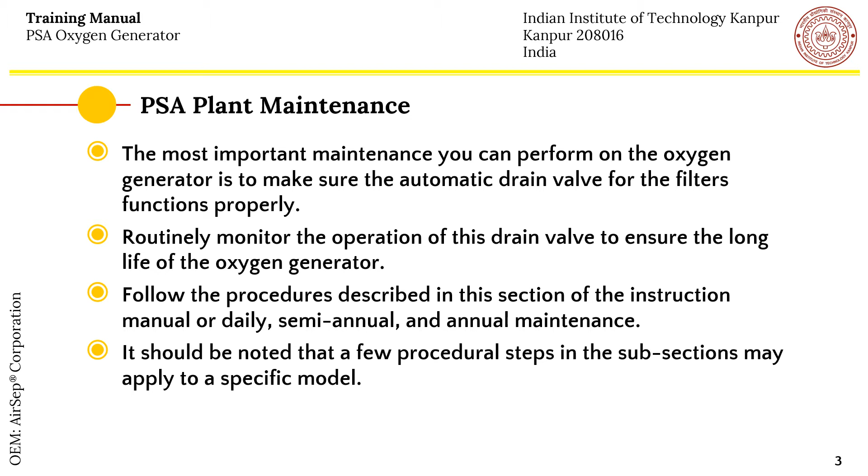Follow the procedures described in this section of the instruction manual for daily, semi-annual and annual maintenance. It should be noted that a few procedural steps in the subsections may apply to specific models only. Use the following chart as a guide to perform maintenance on a regular schedule.

For the daily schedule, make sure the automatic drain functions properly. This is very important. For the monthly schedule, inspect the filters and bowls. Clean the bowls or replace filters as necessary. Half yearly or 6 monthly maintenance, replace the particulate filter element. And every year, annually, replace the coalescing filter element. Check the performance of automatic valves and actuators and clean and lubricate the feed air regulator.

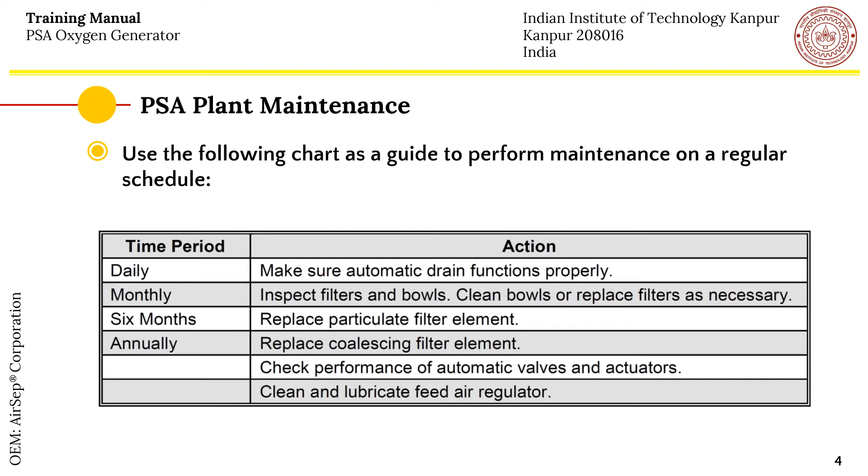Make sure the condensate outlet and tubing for the drain valve is not obstructed. Condensate should discharge from this outlet or tubing for approximately 3 to 5 seconds every 10 minutes when the oxygen generator is running. Press the manual drain button on the control panel and observe the discharge. The discharge should flow freely and be clear of oil and water within 5 seconds.

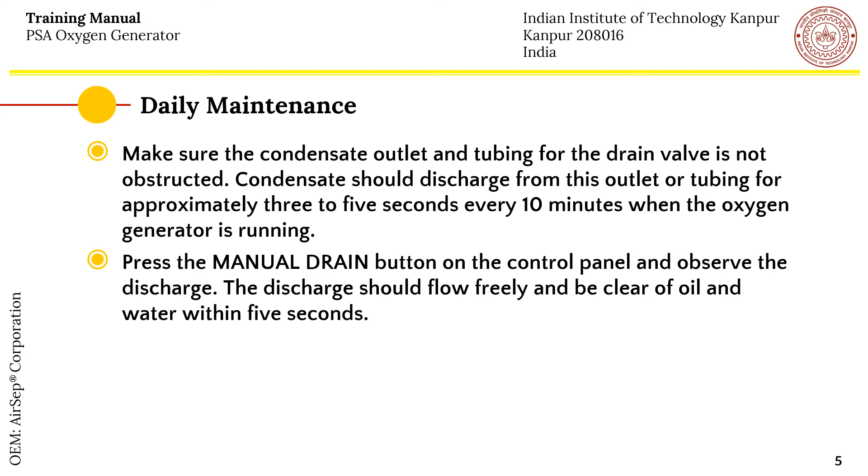For the monthly maintenance, the monthly monitoring requires inspection of the filters and testing the performance of the automatic drain valve. To perform this procedure, depressurize the unit and remove the filter bowls as described in the following procedures. Please refer to section 7.3 depressurizing the filters and section 7.4 changing the filter elements. When the filter bowls have been removed and cleaned, perform the following steps.

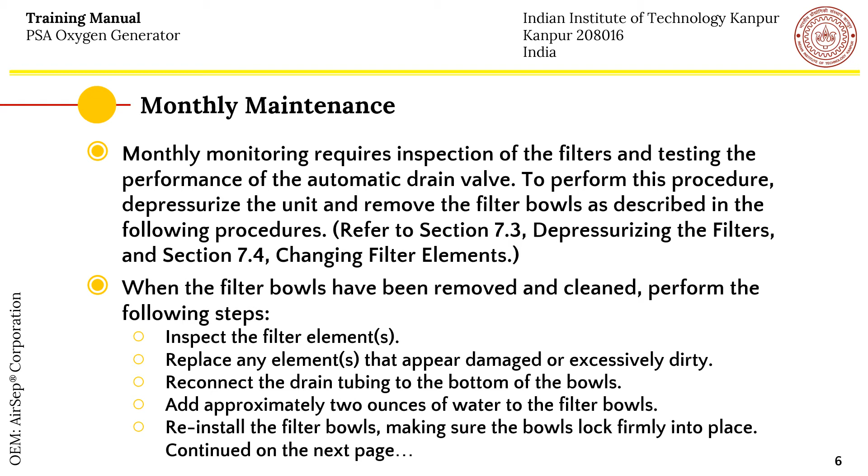Inspect the filter elements. Replace any elements that appear damaged or excessively dirty. Reconnect the drain tubing to the bottom of the bowls. Add approximately 2 ounces of water to the filter bowls. Reinstall the filter bowls, making sure the bowls lock firmly into place. Slowly open the manual inlet valve fully to pressurize the filter bowls.

While observing the drain tubing, press the start icon on the main system control screen and determine whether the automatic drain valve discharges moisture. Fully close the manual inlet valve and depressurize the unit as described later. You can also refer to section 7.3 depressurizing the filters. Remove the filter bowls as described later. Refer to section 7.4 changing the filter elements.

Observe whether the water drained from the bowls. If the filter bowls still contain water, refer to the troubleshooting chapter of this instruction manual later. If the bowls do not contain water, reinstall the bowls and repressurize the system. You can refer to section 6.4, changing the filter elements.

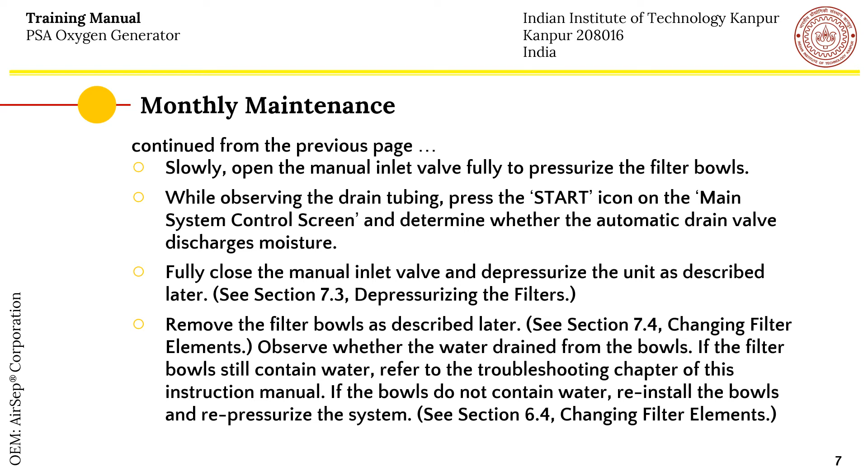Please note, during the depressurization of filters, the oxygen generator filters contain pressurized air. To perform monthly maintenance or change filter elements safely, fully depressurize the filter assembly as described in the procedure in this section. To safely depressurize all oxygen generator components, refer to the procedure described later in this chapter, which is the section 6.5, depressurizing the oxygen generator.

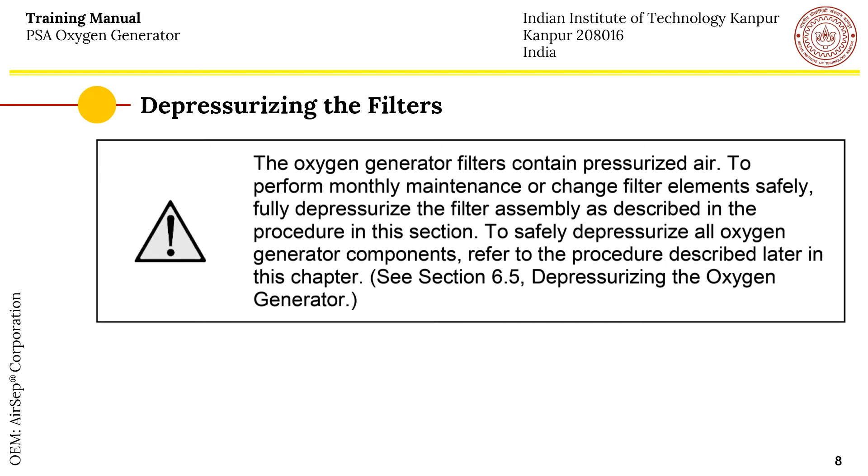Depressurizing the filters. Allow the oxygen generator to stop cycling in auto mode when the oxygen receiver pressurizes fully. Press the stop icon on the main system control screen. Disconnect the oxygen generator from the power supply. Fully close the manual inlet valve V1 and manual filter outlet valve V2. Shut off the feed air supply at the air compressor or air header.

Reconnect the oxygen generator to the power supply. Press the manual drain button on the HMI until the air no longer exits from the drain tubing. Please note, if the pressure gauge does not decrease to 0, shut down the unit and call the AirSep Corporation Commercial Products Division immediately.

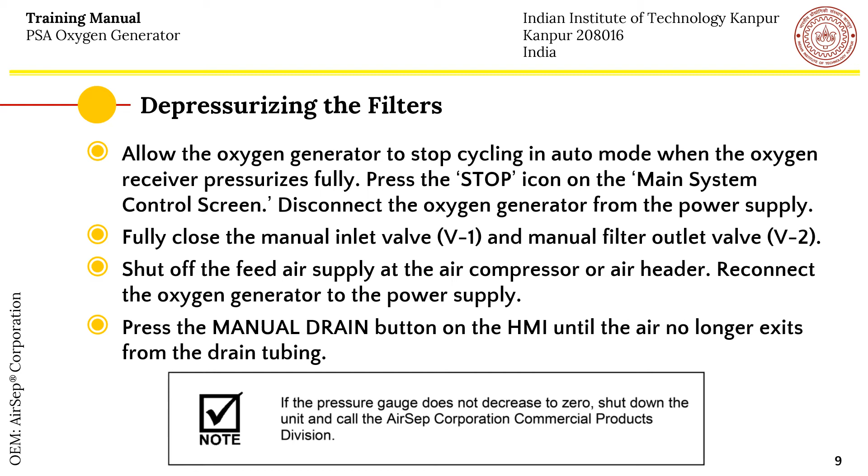Changing the filter elements. The time period to change the filter element depends upon the feed air conditions. If the feed air is highly contaminated with dust, oil, etc., the filter element must be changed more frequently than the specified time interval in the manual. The following procedure describes how to change the filter element for either the particulate filter semi-annually or the coalescing filter annually.

Shut down the oxygen generator and depressurize the filters. Refer to section 7.3, depressurizing the filters. To remove the bowl from either filter, push down the bowl latch and rotate the bowl slightly right or left while pulling down on the bowl. If the filter has screws, loosen them up.

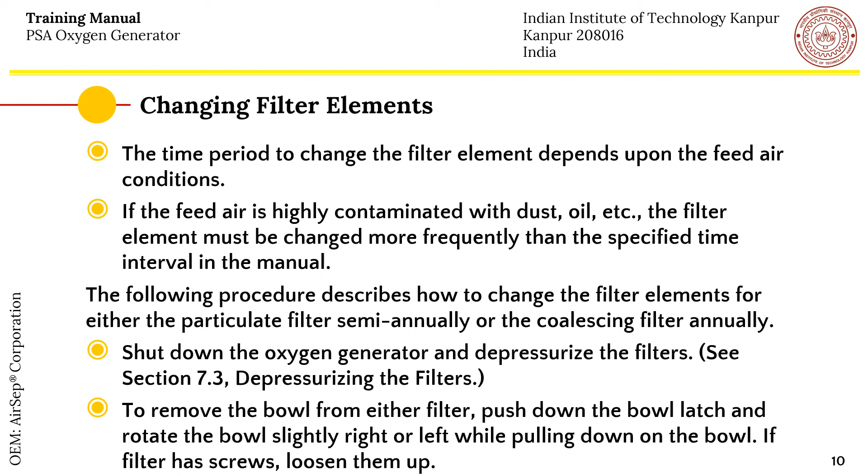When the bowl is free, disconnect the drain tubing from the bottom of the bowl. There may be a retainer nut which has to be disconnected to remove the filter element for the filter models with screws. Wash the bowl in warm soapy water and then rinse the bowl. Gently unscrew the old filter element and discard it.

If you are replacing a coalescing filter element, remove and discard the black gasket where the top of the filter element connects to the filter housing. If you are replacing a coalescing filter element, make sure a black gasket is attached to the top of the new element.

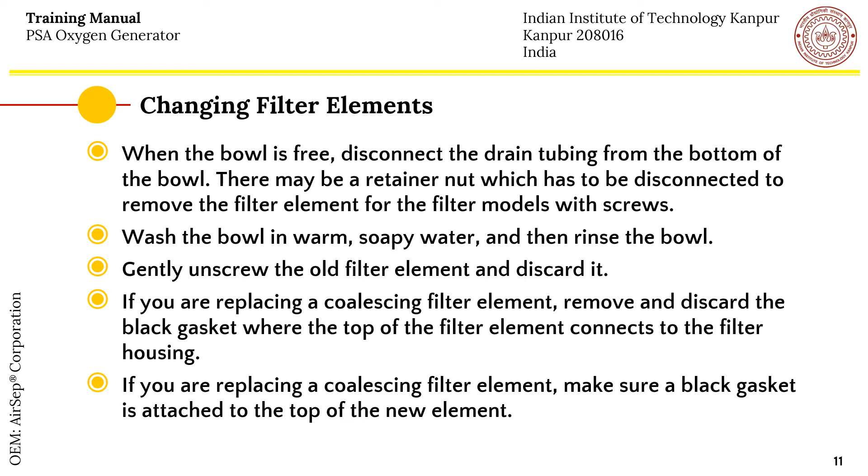Changing the filter elements. Taking care not to touch the filter portion of the new filter element, screw it into the position from which the old filter was removed. Reconnect the drain tubing to the bottom of the bowl. Reinstall the filter bowl, making sure the bowl locks firmly into place.

Slowly open fully the manual inlet valve and manual filter outlet valve. Turn on the feed air at the air compressor or air header. Now connect the oxygen generator to the power supply. Please note, do not attempt to remove the filter bowl unless the filter assembly fully depressurizes as was described in section 7.3.

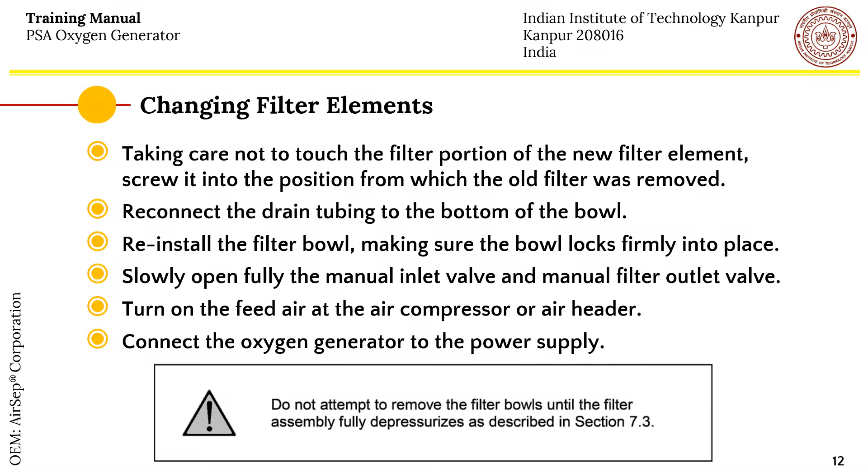The oxygen generator operates with pressurized air and oxygen. To perform maintenance on the unit safely, fully depressurize the oxygen generator components as described in the procedure in this section. Please note, to fully depressurize the oxygen generator components, follow steps 2 to 7 to depressurize the filter assembly as described in section 7.3. If the pressure gauges do not decrease to zero, shut down the unit and call the AirSep Corporation Commercial Products Division immediately.

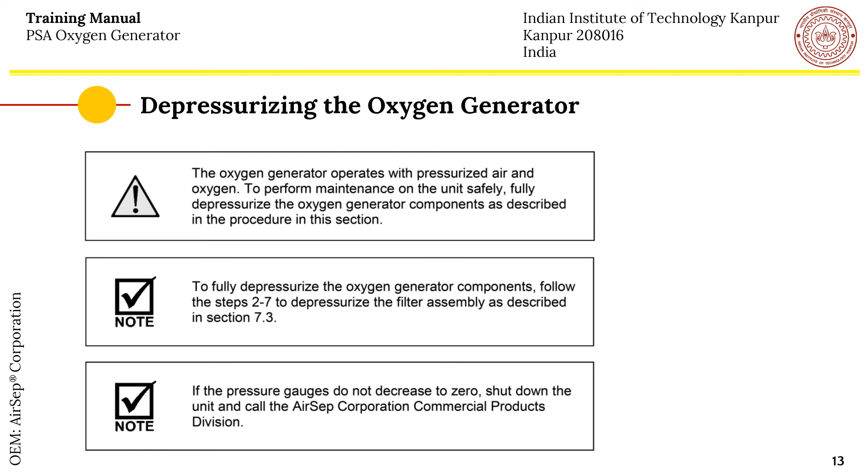Depressurizing the oxygen generator. Shut down the oxygen generator and disconnect the power supply. Please see section 6.3, how to shut down. Fully close the manual feed number 2 valve, that is V2, and the manual product valve V3. Connect the oxygen generator to the power supply. Press the start icon on the main system control screen. Set the oxygen generator to manual mode.

Allow the unit to operate until gas no longer exhausts from the muffler and the parameters and output screen indicate approximately zero pressure. If the unit is depressurized, power down the unit if required and proceed to perform the maintenance.

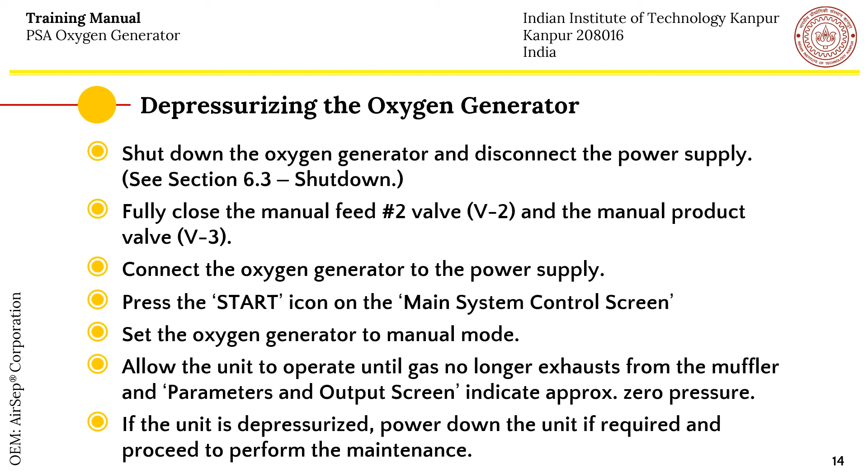Adjusting the feed air regulator. The feed air regulator may require readjustment after any maintenance is performed. Please ensure that the feed air regulator setting is not changed during readjustment. If the feed air regulator requires adjustment, perform the following procedure. Unlock the lock nut on the adjustment knob. To increase the feed air pressure, rotate the knob clockwise. To decrease feed air pressure, rotate the knob counterclockwise.

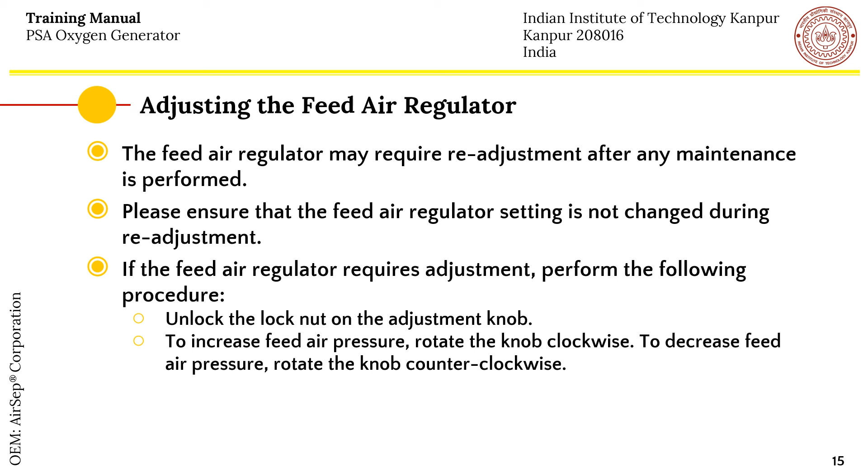While adjusting the feed air regulator, please note, setting the feed air regulator to a value such that the maximum oxygen generator bed pressure is 80 psi gauge or more can cause severe damage to the molecular sieve in the adsorbers, which will not be covered under the warranty. The numbers on the dial of the feed air regulator do not always directly correspond to the actual cycle or bed pressure in the system. Check on the parameters and output screen for the maximum bed pressures.

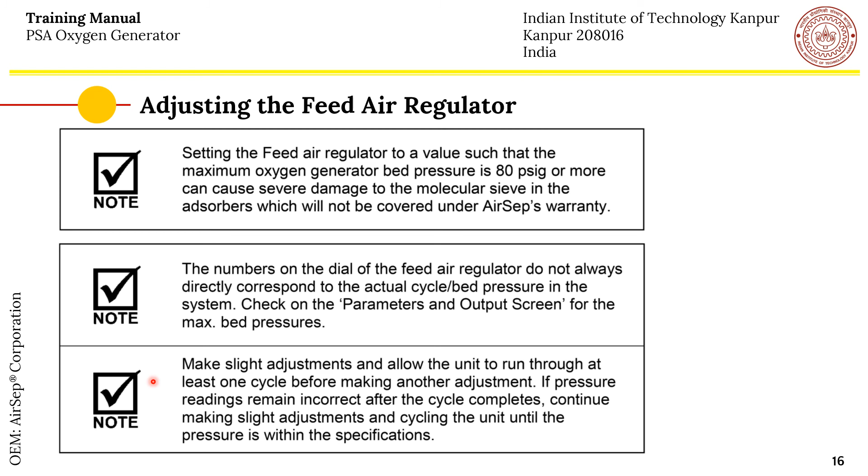Make slight adjustments and allow the unit to run through at least one cycle before making another adjustment. If pressure readings remain incorrect after the cycle completes, continue making slight adjustments and cycling the unit until the pressure is within the specifications.

Let us summarize our activities in this part of the lecture. We have been introduced to the common maintenance issues of the PSA oxygen plant. We hope that this first training will give you the necessary confidence to start working with the plant now. Never take any action, as I was saying earlier also, on the running plant which you are not aware of or you are not confident. Safety of the manpower is of utmost importance. So whenever you do any maintenance work, please make sure that you have read the exact instruction manual supplied by the original equipment manufacturer before you actually venture into opening or closing or doing any activities on the running plant.

In the next part of the lecture, we will see some of the troubleshooting methods for safe and efficient plant operation.